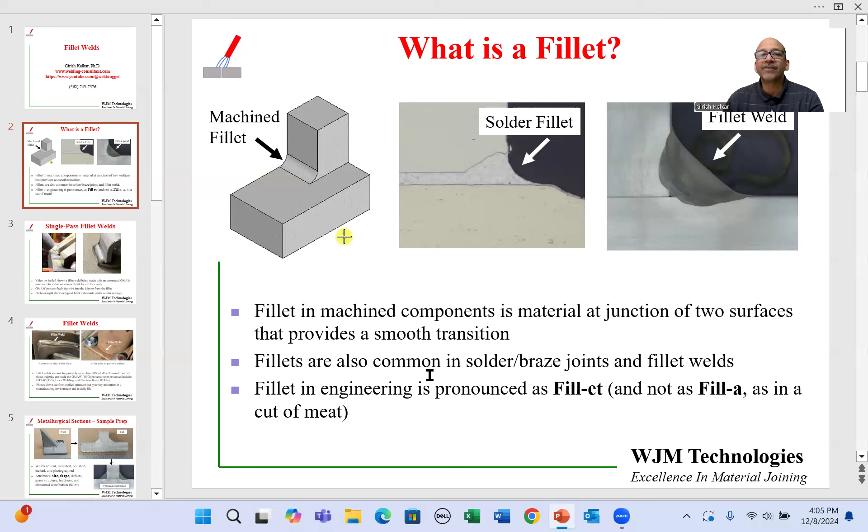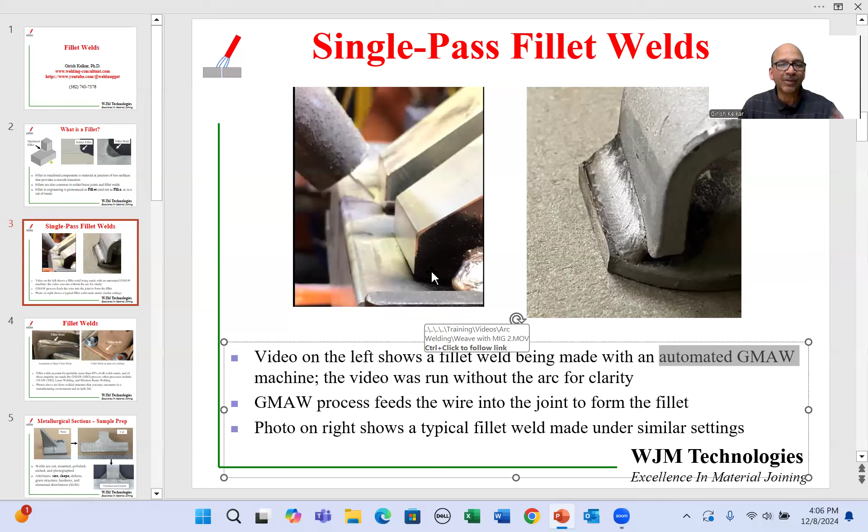What happens is the arc is very strong, so when you look at it, you have to put it through a lot of filters, and sometimes it's not so clear exactly what is going on. So in this case, I have taken the video without the welding, so you can actually see the movement and progress of the weld during this sequence. So here I'm going to start the video, and let's see what it looks like.

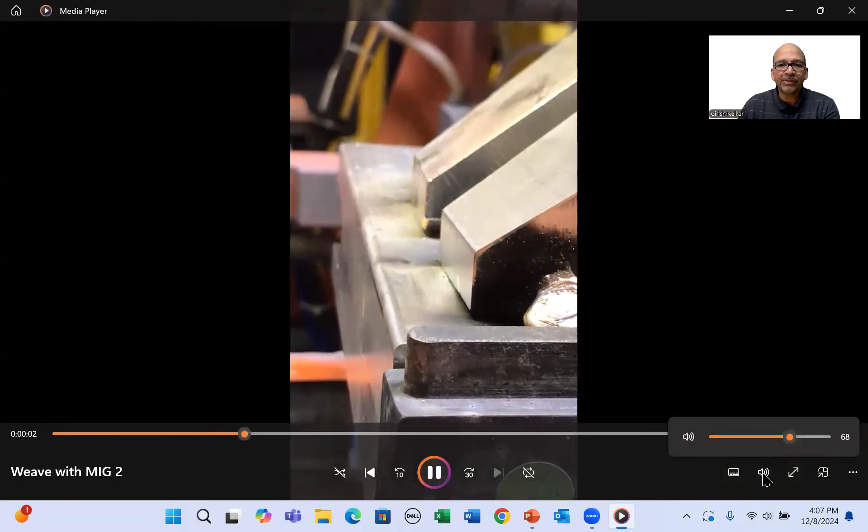I'm going to mute that so you don't get the background noise. Here we can see that the automated gun has come in. It has made a weld. At the end, it retracts. So I'm going to play this again so you can see a bit more clearly this time. And I might pause it a few times on this one.

So here we can see that the gun has approached the starting point of the weld. The wire is extended. Again, if this were a live actual welding video, you would have seen a very intense arc over here. And the arc is hot enough to melt a little bit of both the base metals as well as the wire, and it forms the fillet. It starts from the starting point, then it traverses along the length of the component, and then it retracts.

In this particular case, in order to make a slightly wider weld, I had chosen to add a weave profile. So you can see that the gun, as it is moving, it is also producing a little bit of a weave. You can see the weaving motion, and at the end, the weld will terminate, and the gun will go back, and there should have been a weld over there.

A weld made under similar circumstances is shown on the right-hand side. This is not exactly the same components, but made under similar circumstances, and you can see a single-pass fillet weld from start to finish. In this case, we are talking about GMAW, gas metal arc welding process, which feeds the wire into the fillet. So you are actually adding wire to create that fillet.

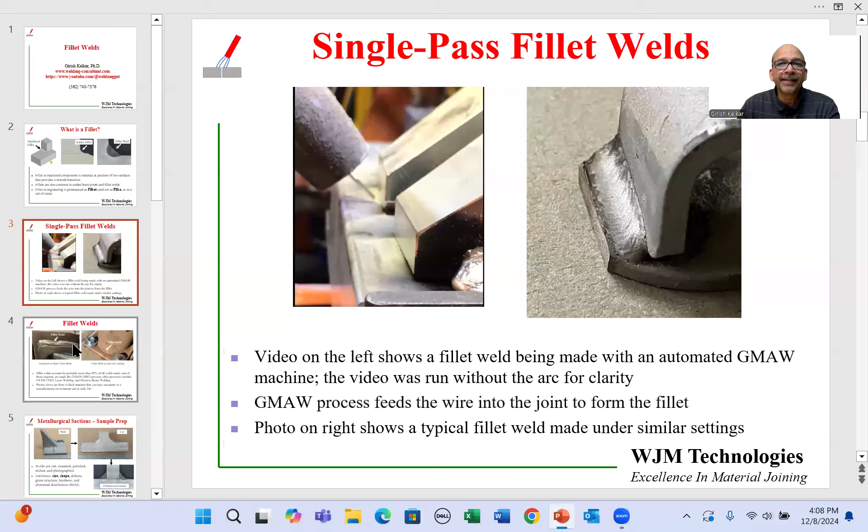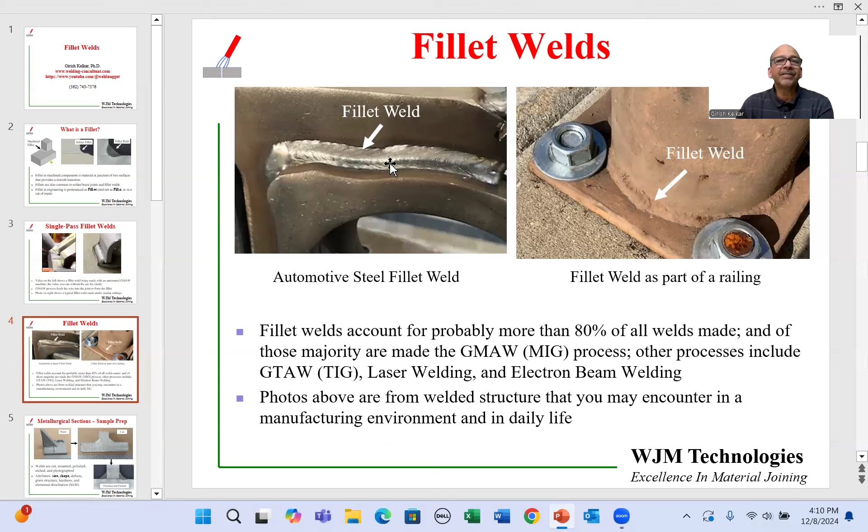We can look at these welds and get some idea about the quality by looking at the size, shape, profile, visual defects, and so on. However, to get a full understanding of these welds, we need to look at them on the inside. Now, there are some non-destructive techniques that can be used to look at the welding quality without cutting up the weld, such as ultrasound and X-rays and CT scans. But ultimately, you do need to make the cross sections because that kind of information is not available by any of these other non-destructive techniques. So we're going to see how we cut up these welds and look on the inside.

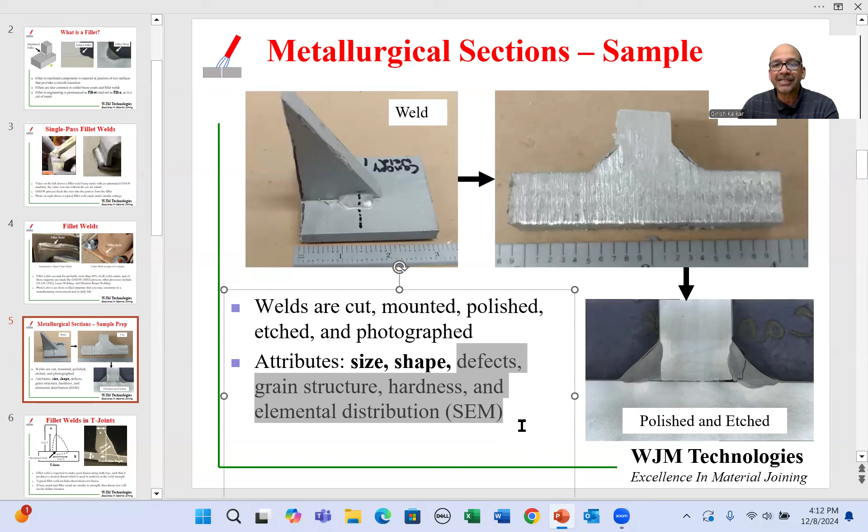In this video, we are going to focus more on the size and shape of the fillet welds. We can glean a lot of information about the defects, grain structure, hardness, and elemental distribution of fillet welds from these cross sections, but we're going to save that for a later video.

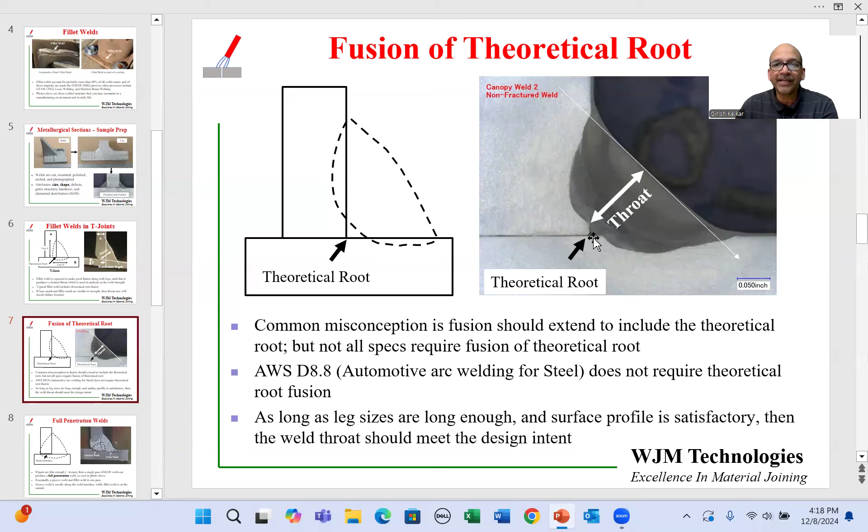So this is a typical fillet weld where we get some fusion beyond the theoretical root. This is a weld where we do not get any fusion at the theoretical root. And the other extreme is a full penetration weld. A full penetration weld is a weld where the fusion has gone all the way along the weld interface. Here again, I'm showing you a schematic on the left.

So essentially we have made two welds in one pass: a groove weld and a fillet weld all in one pass. So this is also possible, if the components are thin enough and you have set the right welding conditions, you can get a full penetration weld. And this is true when parts are fairly thin. If the parts are less than 4 millimeters, especially in steel, it is not difficult to get the settings to get to this point.

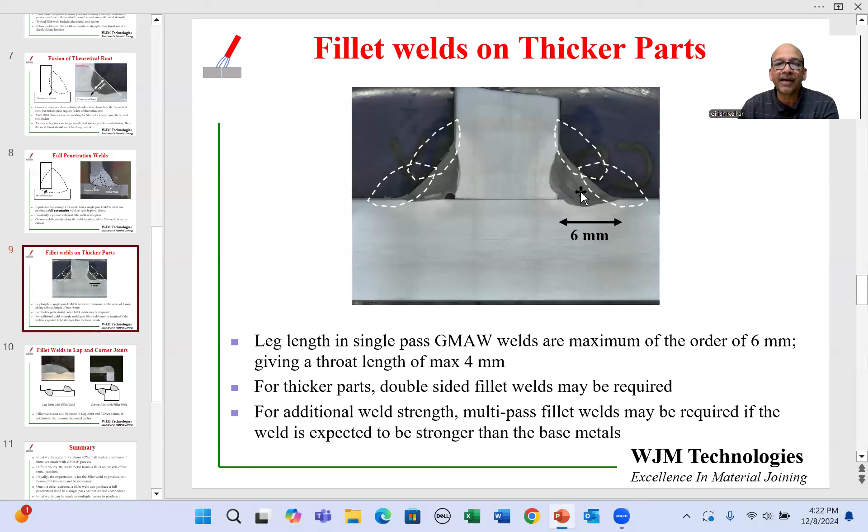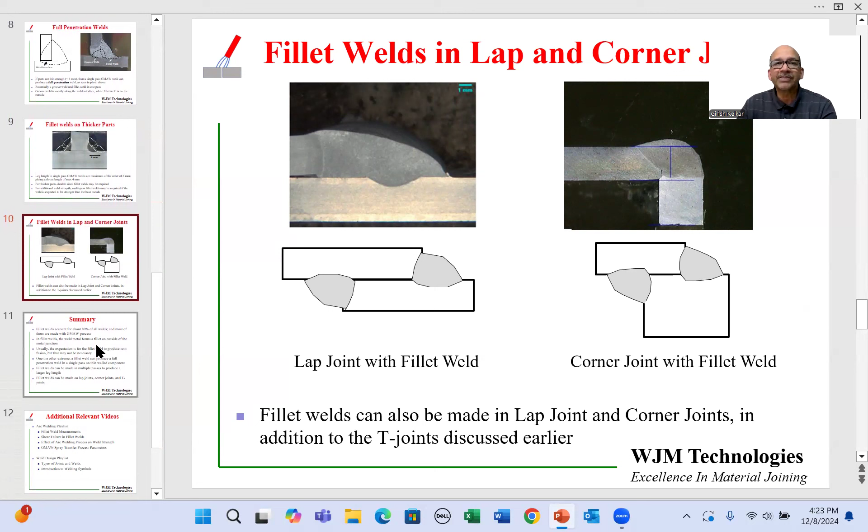So in summary, fillet welds account for 80% of all the welds. So it is very important. It's essential if you're in the welding business to understand fillet welding and all the nuances because they are so common. Of these 80%, the majority of them are made by the gas metal arc welding process because that is one of the easiest ways to make a fillet weld.

In a fillet weld, the weld metal forms a fillet on the outside of the metal junction. So the expectation is that the majority of that fusion and welding is on the outside, so not a lot along this weld interface. So the majority of the weld is going to be outside in most cases. Obviously, it's not always the case. I have shown you some examples over here.

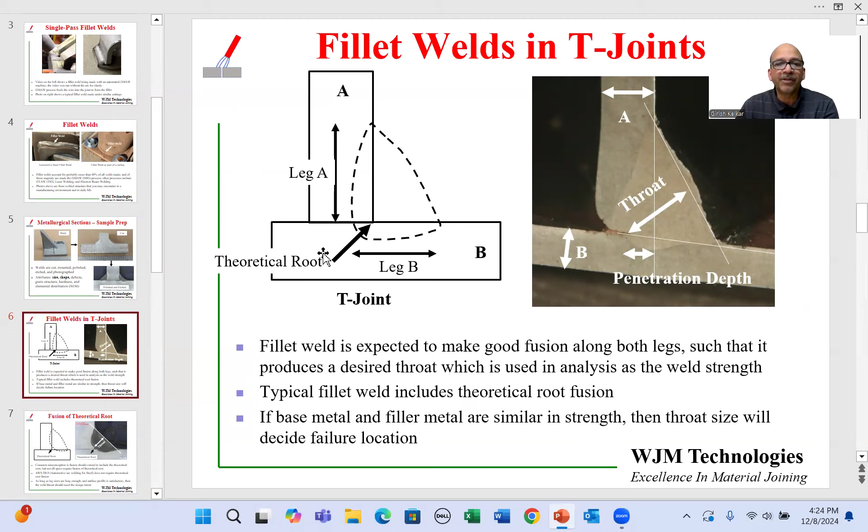So usually the expectation is for the fillet weld to produce root fusion. That we also discussed. Usually a default expectation is that the theoretical root will be fused. But again, make sure you carefully read the specification you're trying to meet because it may not be necessary or required in that particular case.

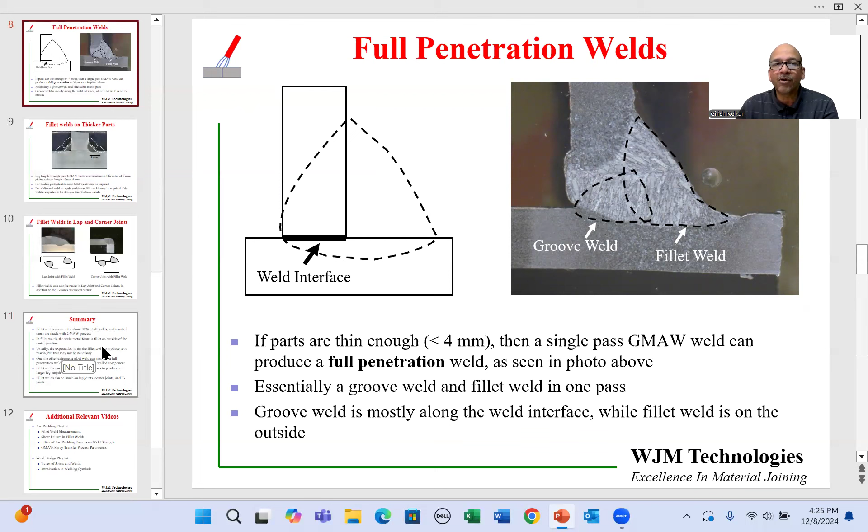On the other extreme, we can have a fillet weld which actually produces a full penetration weld. If the wall thickness is thin enough, you can make a weld in a single pass, which can produce a groove weld as well as a fillet weld to produce a full penetration joint in a thin walled section.

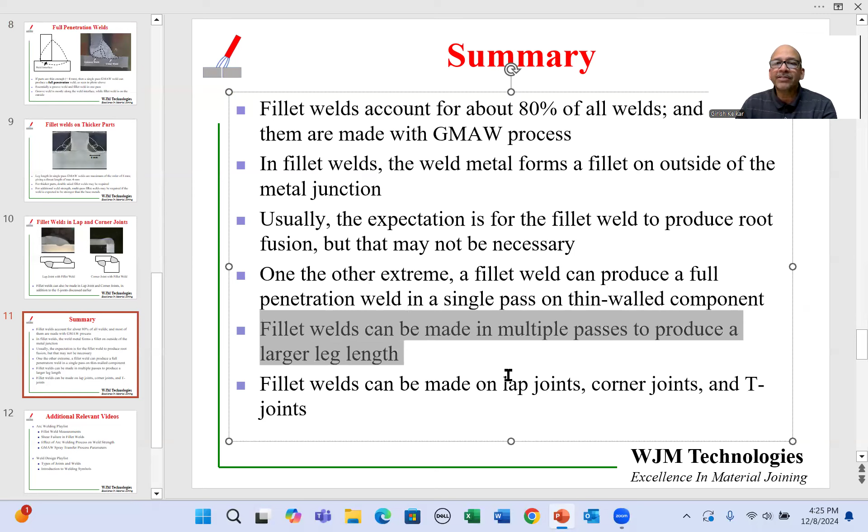As I mentioned earlier, I have posted other videos which are relevant for this discussion. So if you're interested in finding out more about fillet welding, I would recommend that you watch these videos: fillet weld measurements, how to accurately measure the fillet weld size and shape, get a better understanding of how fillet welds fail when they are loaded in longitudinal as well as transverse loading. We can understand the effect of the arc welding process on weld strength, how the arc welding process itself changes the weld strength of the wire that you're feeding into it.

And there's a video on gas metal arc welding spray transfer process parameters to understand how such welds can be made with minimal spatter. A couple of other videos which might be of interest are types of joints and welds, which cover the topic of fillet welds, and introduction to welding symbols, which also covers the topic of fillet welds.